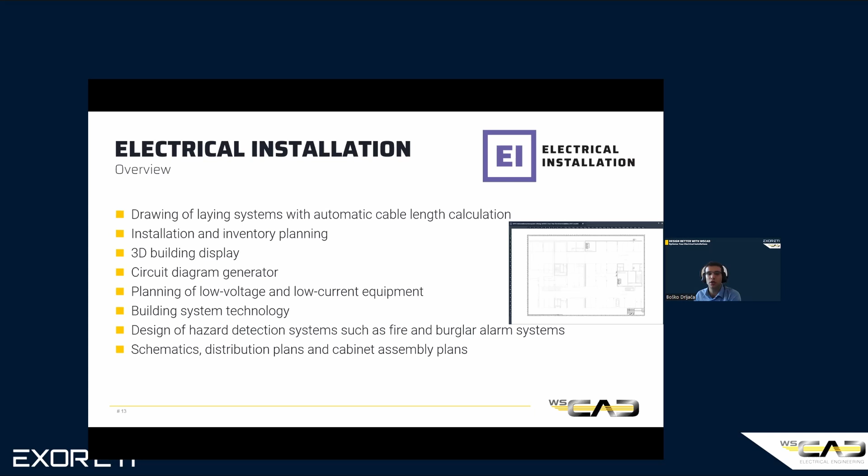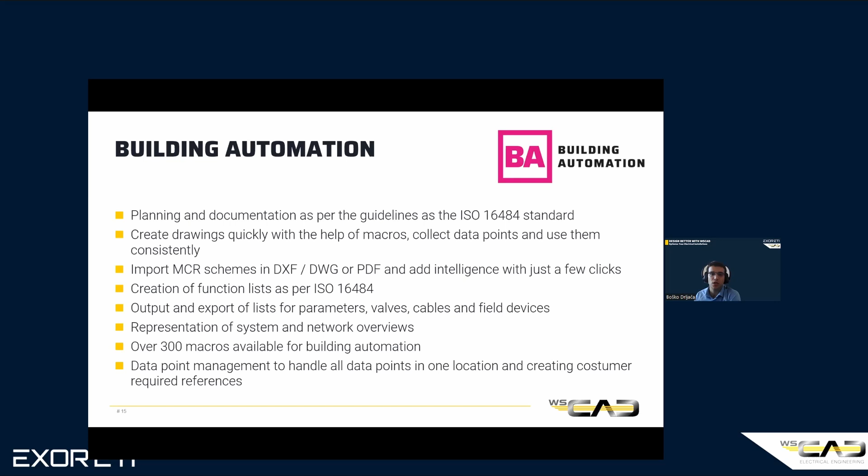I would also like to briefly mention the building automation discipline. It is used for planning and documentation as per guidelines such as the ISO 16484 standard. We have over 300 macros for building automation available with the installation of WSCAD, which improves your efficiency and accuracy. Here we can generate function lists and handle all data points in one location with data point management. You can also create all the necessary references.

As I said, we will also briefly mention the building automation augmented reality application. I would like to show you a short video clip. How does it look like?

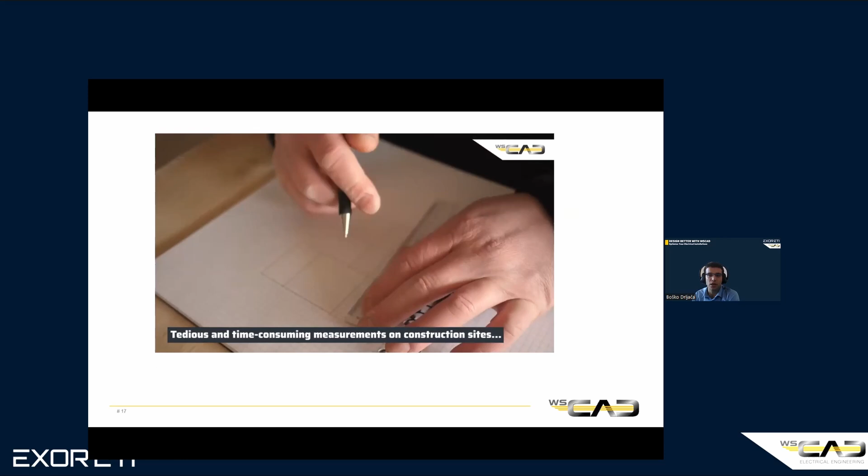So to say it shortly, if you need a floor plan on the spot, you can generate it with our BA augmented reality application using your mobile phone. Simply scan the room you're in. You can also mark doors and windows, and the application will generate a floor plan that you can immediately use and also export to DWG or DXF.

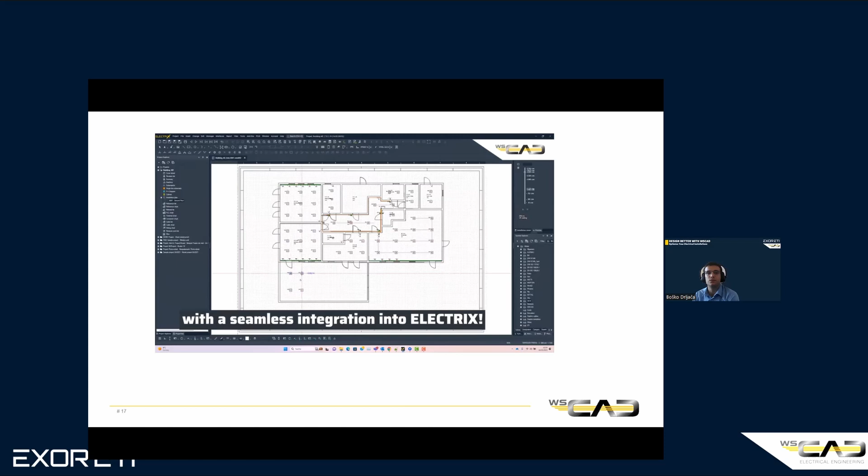I would also like to say a couple of words about WSCAD. As I've mentioned, it's the biggest symbol database in the world. It has over 2.1 million components from more than 400 manufacturers.

It has E-class compatibility. And what I would like also to mention is that WSCAD Universe is integrated in the interface of WSCAD software, so you do not need to open your browser separately to search for the parts. You can do it from the software itself.

Also, WSCAD Universe is free of charge for manufacturers, which is one of the main reasons that we are officially the largest symbol database in the world.

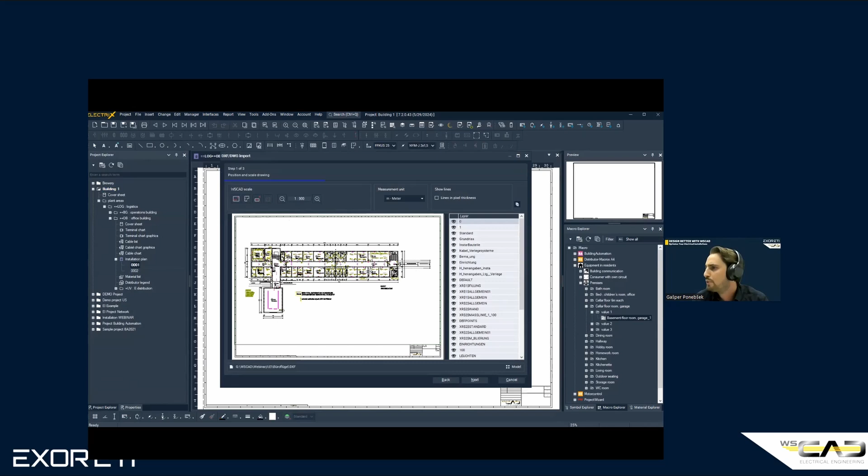These offices, we have multiple layers, so we can zoom in to see there's a lot of layers. So we don't want, for example, right now this description of the rooms. And let's say that we want lines in pixel thickness.

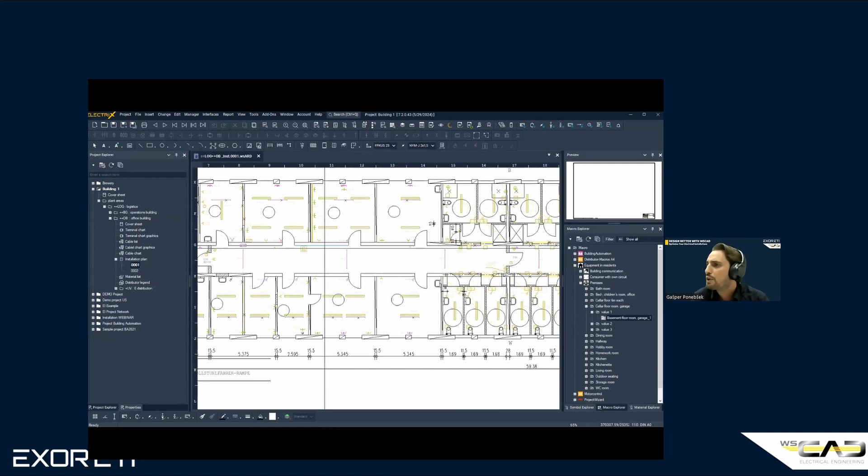We go forward. Here we have two options: embedded in page, but now today we will convert to WSCAD format. Why? Because if you check here, we have these blocks, and WSCAD automatically has a possibility to create blocks with lines. If we zoom in right now, we will see that actually this is an old plan.

We inserted also symbols. Here you can see lamps, sockets, and here you have these symbols. Actually now they're just lines, but we will convert them. WSCAD actually can do it automatically, but right now we will do it manually to see how it works.

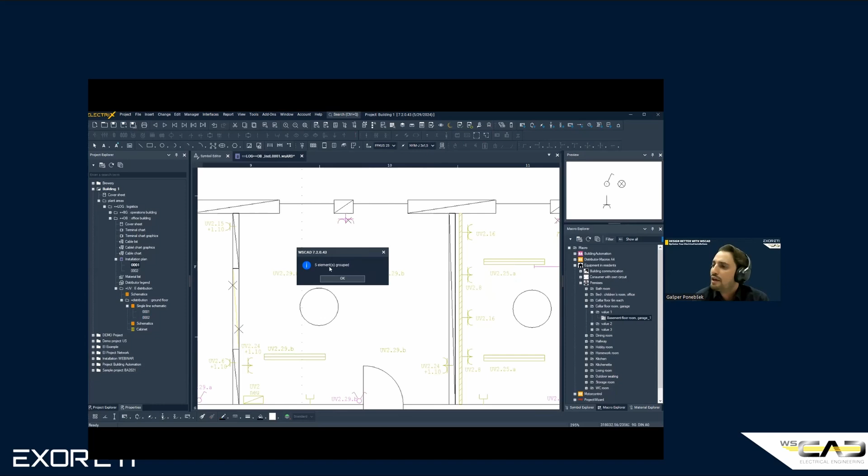So for our demonstration right now, we'll just remove these lamps, and right now we can just create one symbol. So right click, function, graphic selection, and you can see five elements were grouped, and you can see we can open right now this symbol.

You see here we can insert some reference names, we can insert some parts from our database, but right now we will do something more. We will open our symbol editor and add some features.

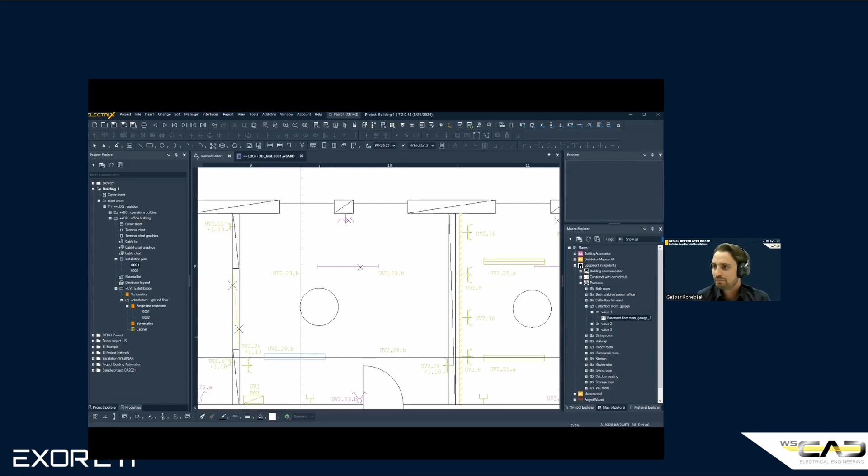We want this symbol to actually be installation, and we want for now that it's standard. We can also categorize it, that this is the lamp. So we will save, and now we have the possibility to swap this symbol. And if we open again this symbol, you can see right now we have much more information to fill out.

So right now we inserted the height, the installation zone 250 centimeters. The reference names, let's say, here would be the same like in the old plan. We can, of course, create some new name.

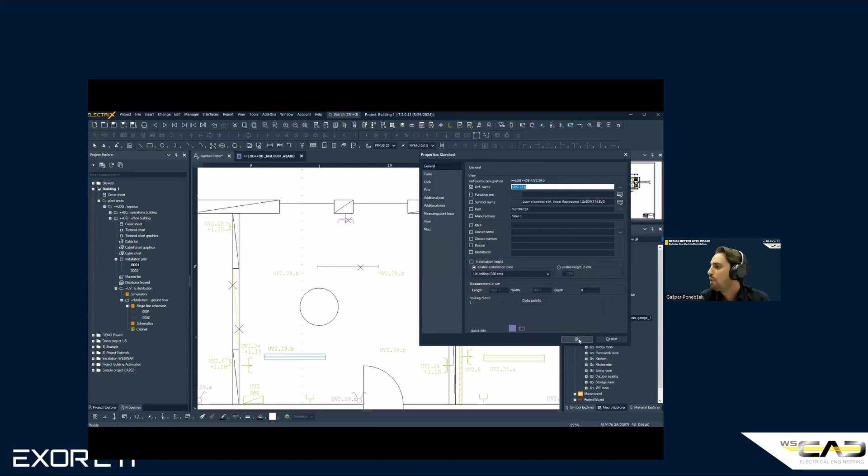Here you can see we can directly import the part from our database. So now we have a lot of information. This lamp actually is this object now, it's a smart object. So we can copy this just to see how you can reuse some old plan from some other ECAD system. And also, WSCAD could do it for you automatically, the conversion of these blocks, so you automatically see that this is a symbol. Okay, we just copy.

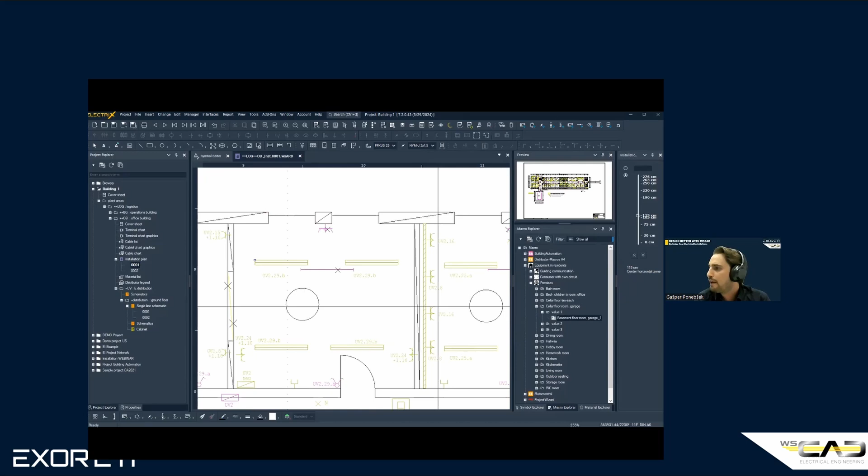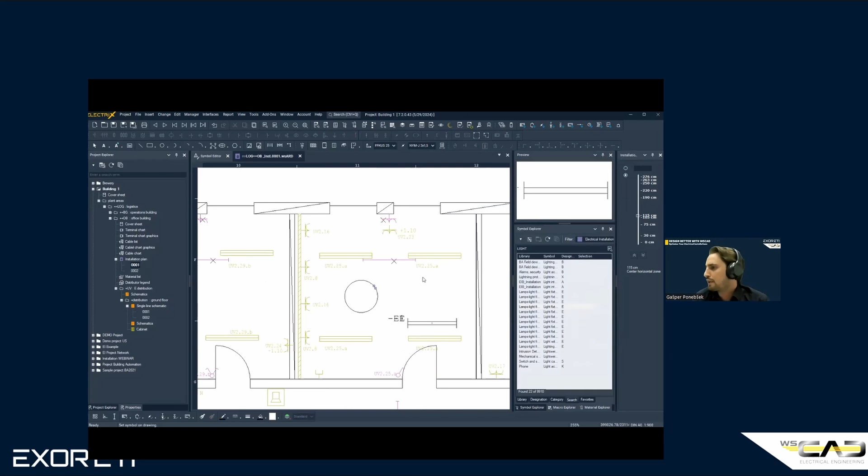And for example, if it's a new DWG or DXF, we can insert our symbols, because we also have a pretty big library of symbols for the installation plan. So like now we just choose some of the lamps.

So right now we will jump into the single line scheme. As we know, in our market we have a lot of customers who are still using single line scheme. That's why we also created a toolbar especially for this occasion, and you can see we can just insert this single line symbols. And here, let's main switch.

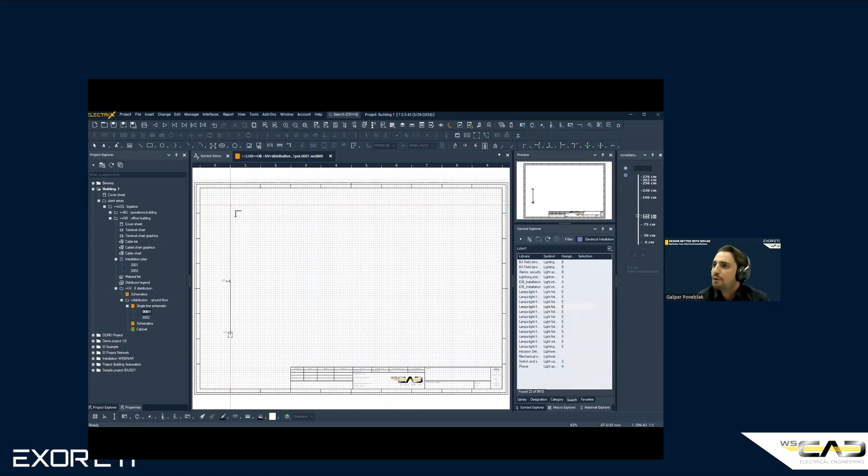We will insert some part from the main switch. Let's choose the main switch from Schrack manufacturer right now, and then we can connect with these smart lines. And here the last line, the arrow, the name should be L123N, because this is a single line scheme.

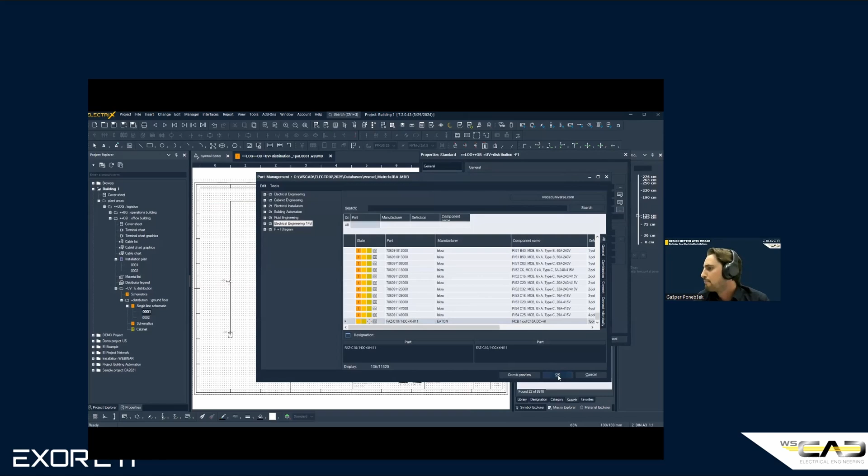And we just need to insert some circuit breakers like this. And also here we can insert some parts. So let's say this C10 amperes, it's good for the lamp.

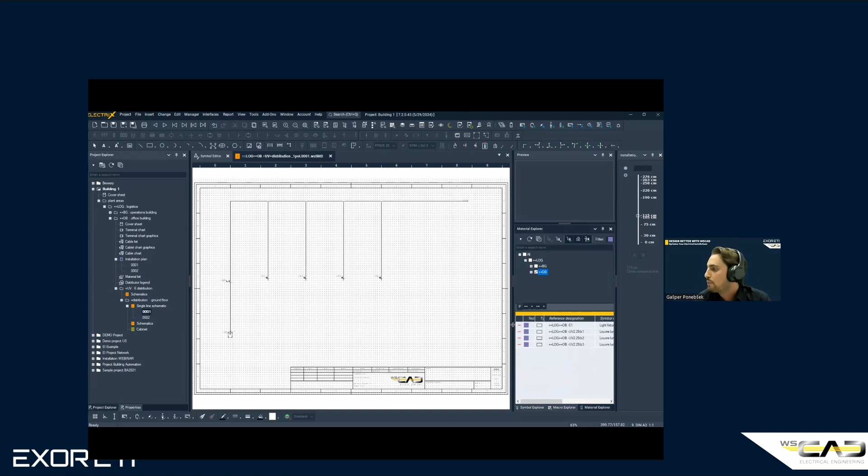And here we also have the possibility to duplicate some symbols or elements in our scheme. Right now we will open this Material Explorer, and you can see in Material Explorer we already have these lamps which we designed in the installation plan. We can just double click and insert it on our one-pole scheme.

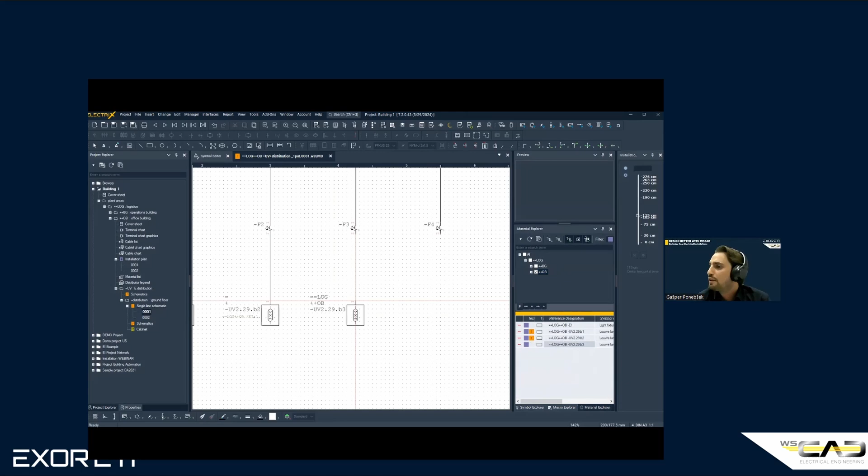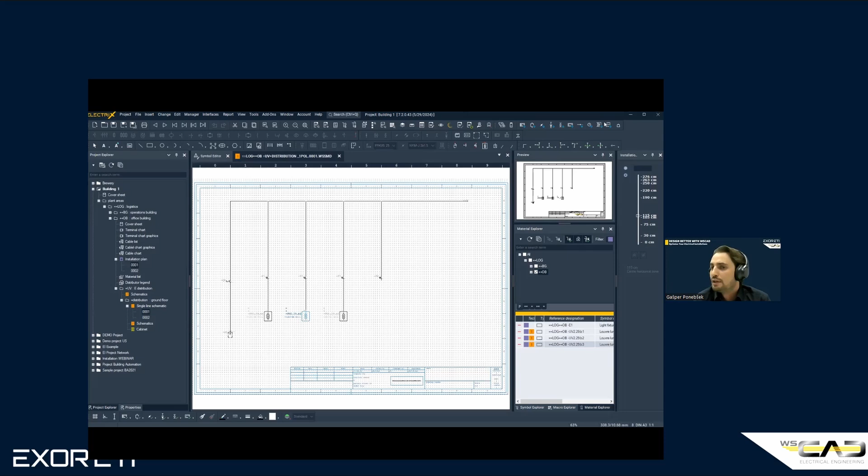So you can see we can connect now this old plan to our WSCAD, and we can do it multidisciplinary. So here we have these cross references. We can zoom in, actually this now is a smart object. Here we have a technology navigator. We can jump back to one-pole scheme. So this is a quick demonstration in what case we can also use our DXF or DWG plans.

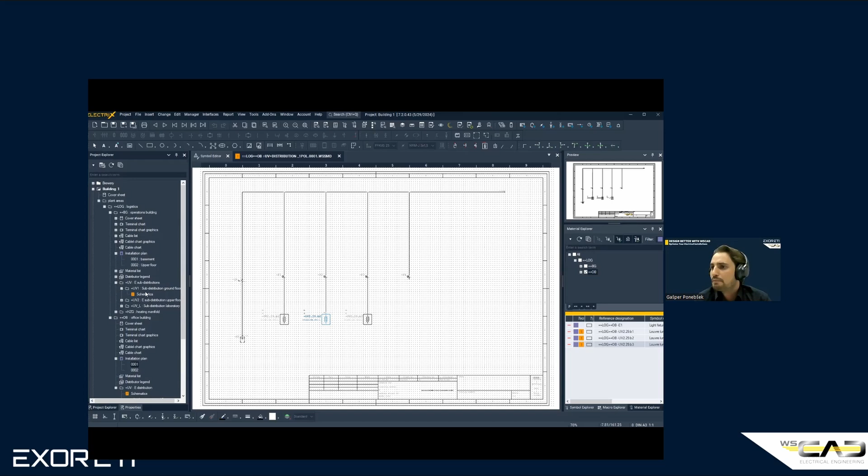Of course, if we don't have any symbols, we can draw it by ourselves, the new one from our libraries. Right now we will go back to operation building. Here you can see we have some sub-distribution, some floor. Here we want just to show you that it's possible with this distributor and circuit manager to actually generate.

In our case, right now, we will generate the three-pole scheme. So we just need to define the distributor and where it should be right now. This distributor is like here in this location. We want to generate some schematics automatically.

We need right now some supply. And you can see here we have macros already predefined. The supply will be TNS without energy meter. And we can go forward.

You can see right now the preview, but we also need some bus bar. So like this, you insert this bus bar. Let's say it's a 4-pole MCB.

And now you can see we can create a new circuit. We can define the circuit name, so it could be the circuit name here. We also predefined names like heating, and then we can go forward.

We can insert some more. Right now we have, let's say, light heating, and there's also a possibility, if the circuit name is the same, we can copy it and paste, and you can see it could be much faster.

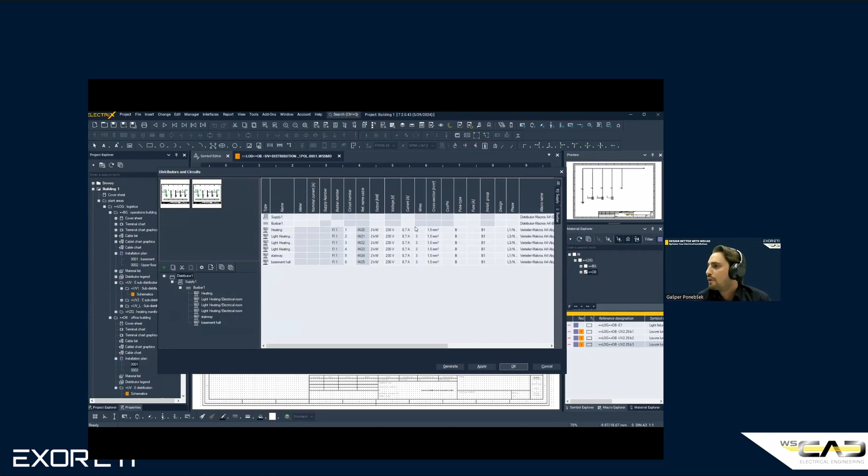And what is very important here, in circuit number we have to number the circuit numbers. We have the possibility to automatically renumber. Also, we can do this with cable reference names. So we just select everything, right click, renumber. It's very efficient, like an Excel file.

And now we will just generate it, select here. And so here it would be, it will be generated.

Now we have just 2 pages because this is our demonstration, but in reality we can generate much more pages.

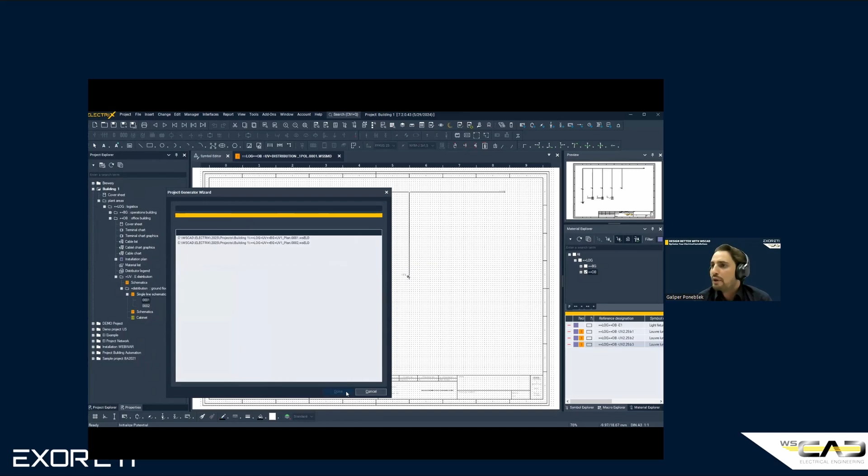Here you can check the supply, okay. This is the name of it, here we have heating.

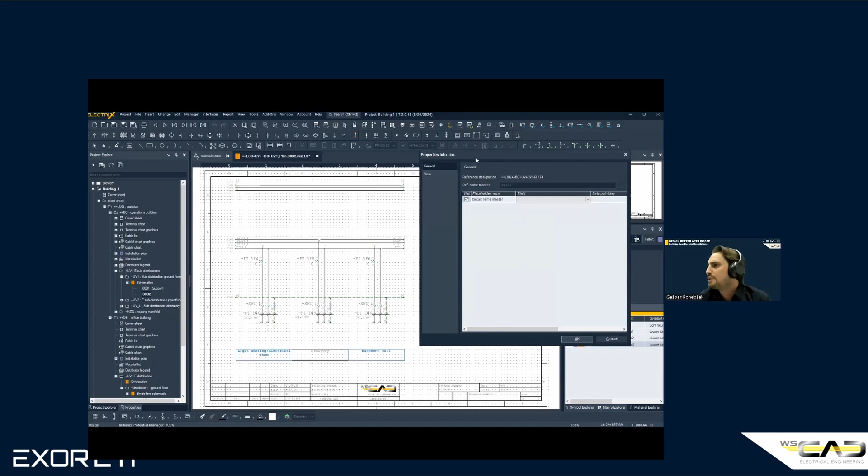You can see the cables are, everything is fit. If we would need more information, we will fit it. Here also, this is information link. You will see later something, we will tell something about the information link.

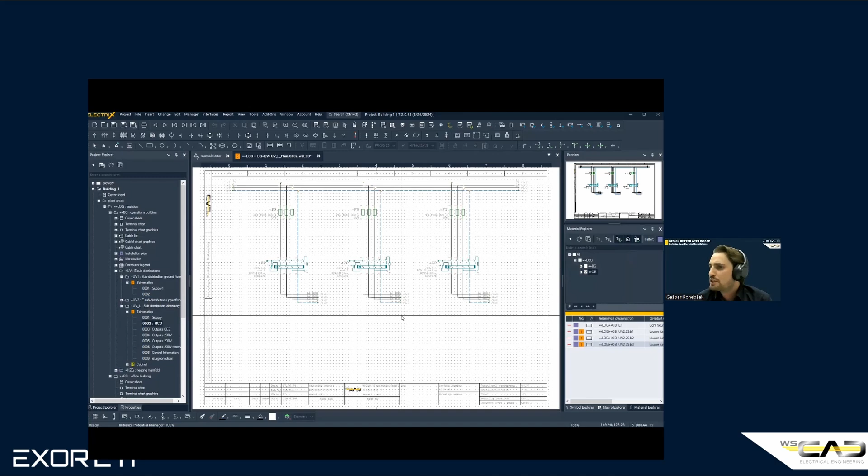Here we have this distribution laboratory. You can see we can check some scheme. You can see we can define potentials, just to see a little plan how you can work with a 3-pole scheme.

And yeah, the next page here, you can see something is missing. We will add some elements. Let's say we will add terminals.

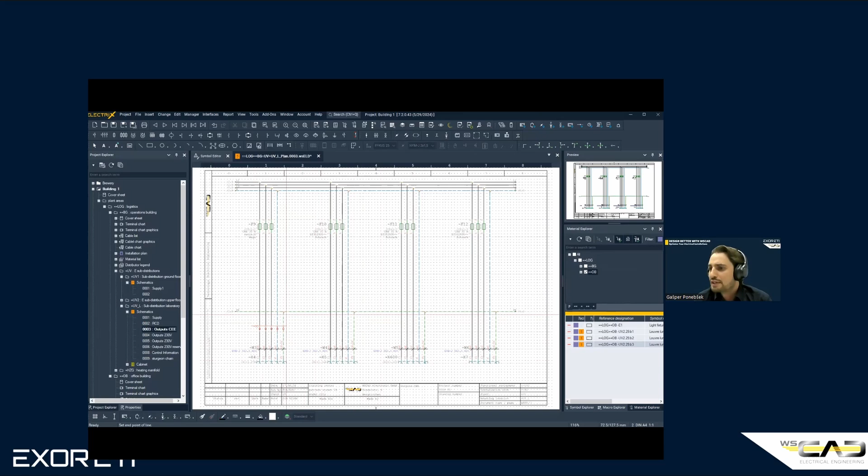We have many options how to insert terminals. Let's say we won't complicate right now, and we will just insert it without the terminal manager. We have much more possibility how to insert elements.

Here, you know, something is missing. We don't have any description about these circuit breakers. We can just find the symbols.

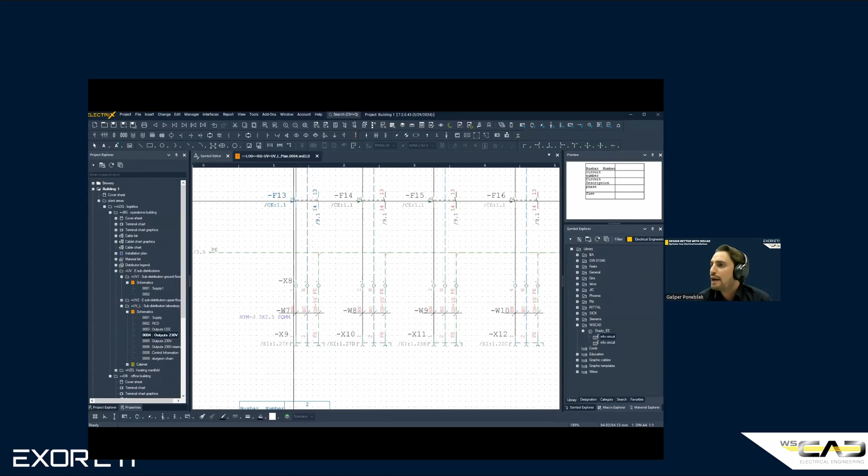So this info link, we can insert this info link. This is a special symbol. When you connect this info link with this, you can see circuit breaker F13 automatically collects the data from this electrical installation.

So here you get all this installation information, which is important here. We can also change the circuit. Maybe just for demonstration, we can change it to heating. And you can see everything is now different.

And here now we can just update the info link. We update it, and now we will insert some more info links just to see how you can easily work with it.

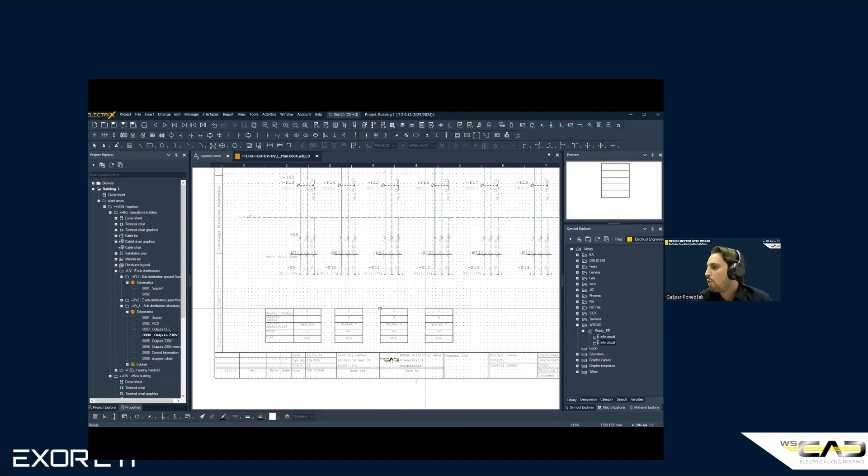So we are gathering this information. Let's copy: left click and again left click, and then you gather all this information. In the next page, everything is already filled out. So we can go to the next page, control information.

Here, yeah, let's say something is missing, the coils. We will insert the coils.

Here we have this contactor manager. We will work with the contactor manager. We will insert the proper part from our database. Let's say this is the proper one for our application.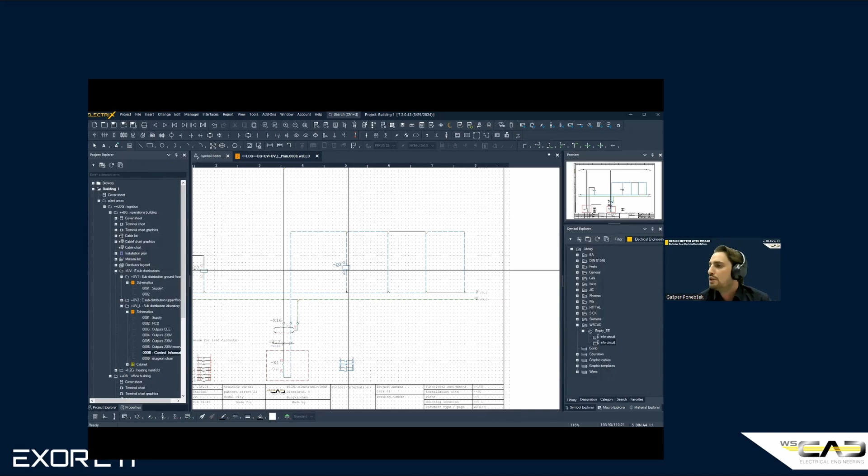And now you can see we have contacts here, and we can also connect, copy, just to see how we can add some more coils with all this information.

So here we have these contacts which are in our part, and you can see the red ones are already placed on the scheme. The green one is reserved, it's just in the contactor manager.

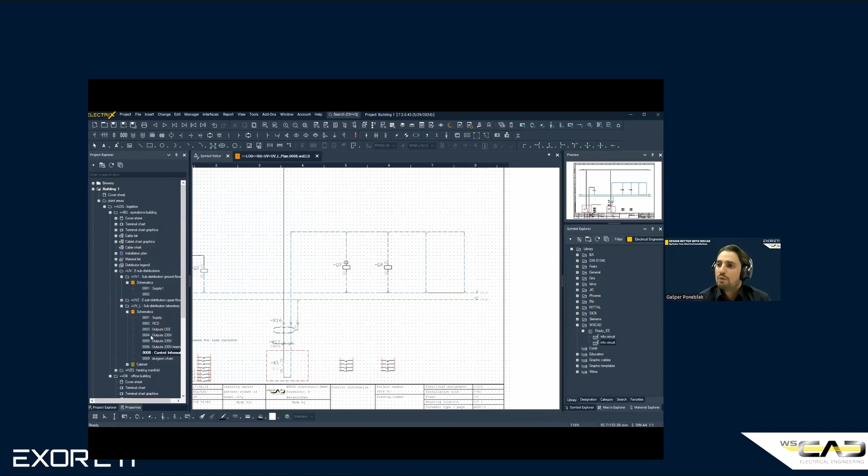So we can go back to our outputs. Here, this contactor is missing, and we can also use these toolbars. Just click here from the toolbar and select which contact do we need.

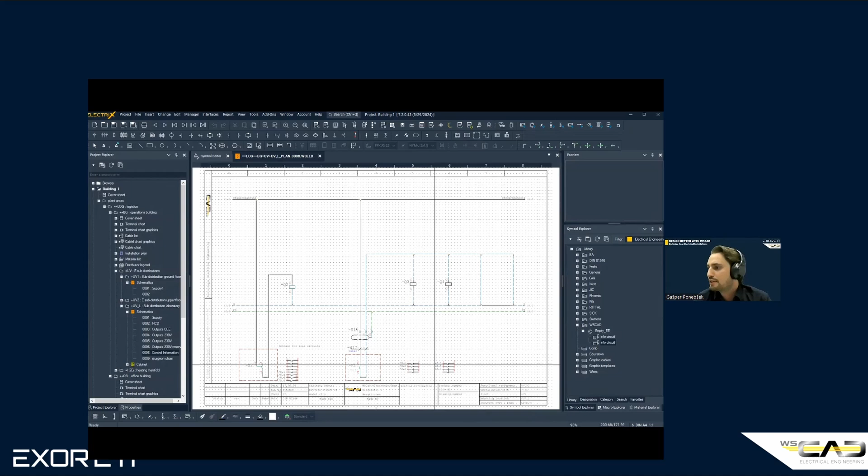So again, a new contactor we will insert, and you can see automatically this cross-reference created, and we can jump now and we can see.

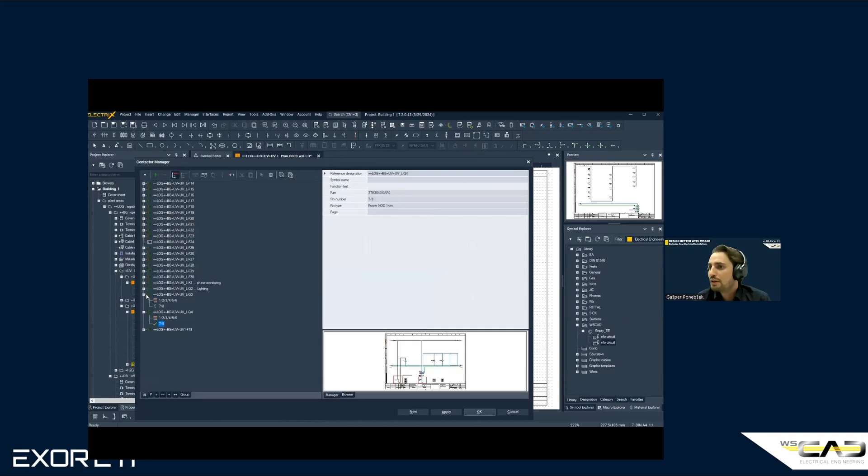So in the last page we also need some contact for our application. We will insert this other coil, from other coil the contact, you can see, and we have all these connections, and we can see how everything is connected. Also here we can connect, because this is not connected.

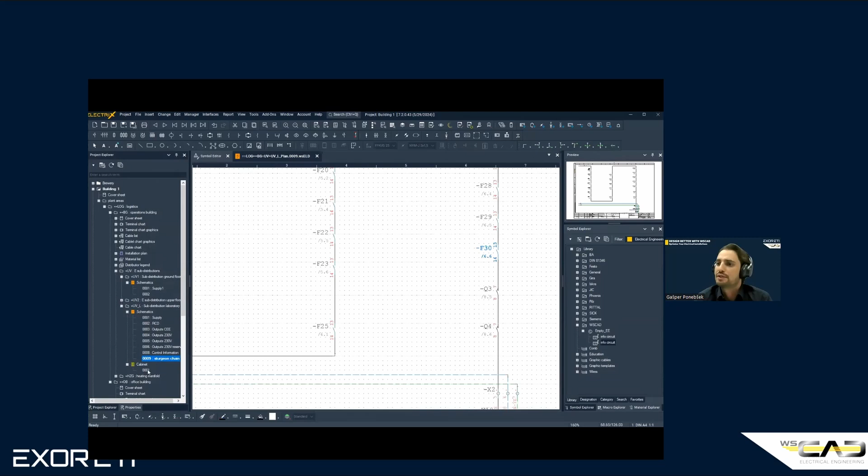So let's say that we finished this part, the three-pole scheme, and now we will just go to the next page, cabinet. On the mounting panel here, we have already some elements, and we can open again this material explorer. You can see we can select our location, and with the filter choose our discipline we want from electrical installation.

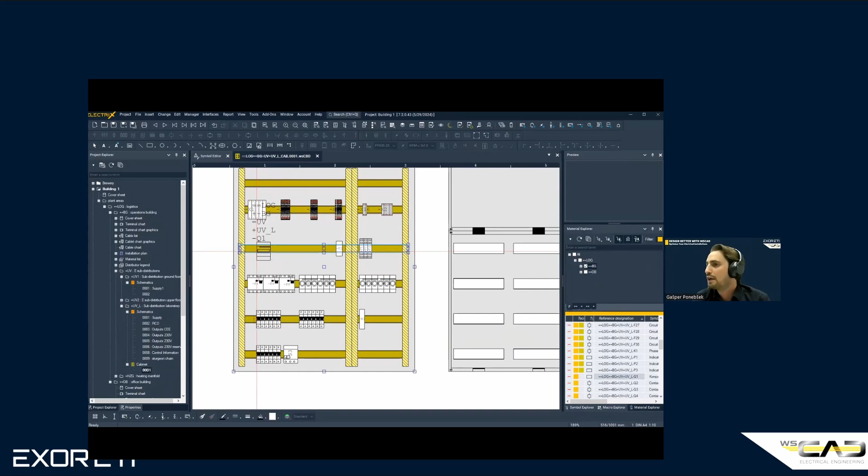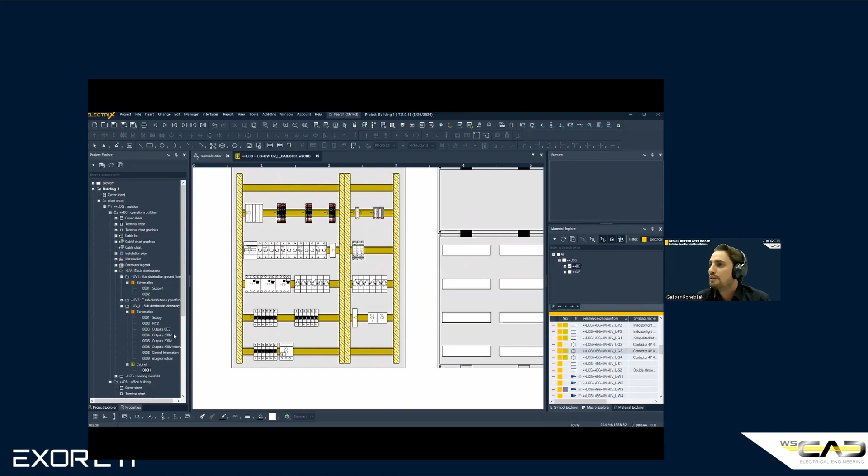Insert some more elements. Let's insert the main switch with double click and place it on the DIN rail. It's easy. And then also, if we want to select multiple elements, for example this fuse, just right click here, select it, and right click, and again left click, and we have this information here. So again, we select the elements and place them on the DIN rail.

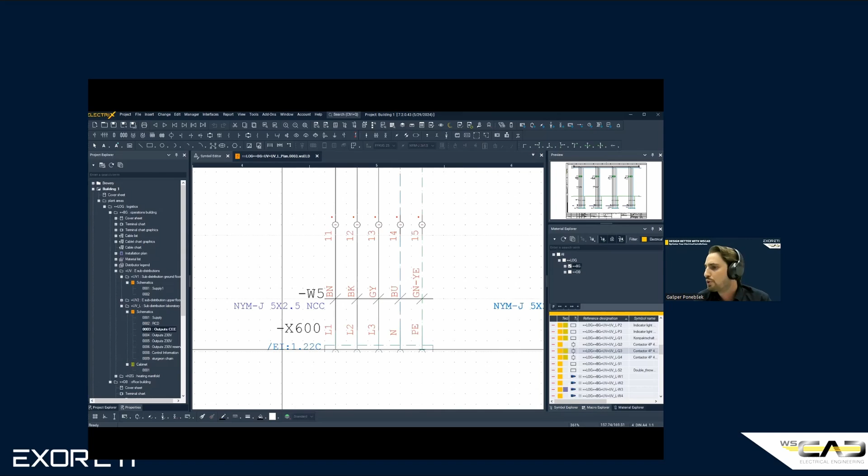So we can go back here. If you noticed, here we have also some cross references to the installation plan. Here, if you remember X7 right now, and this cable, we don't have any cross reference. It's not connected. Now we can, with right click, jump directly to our installation plan.

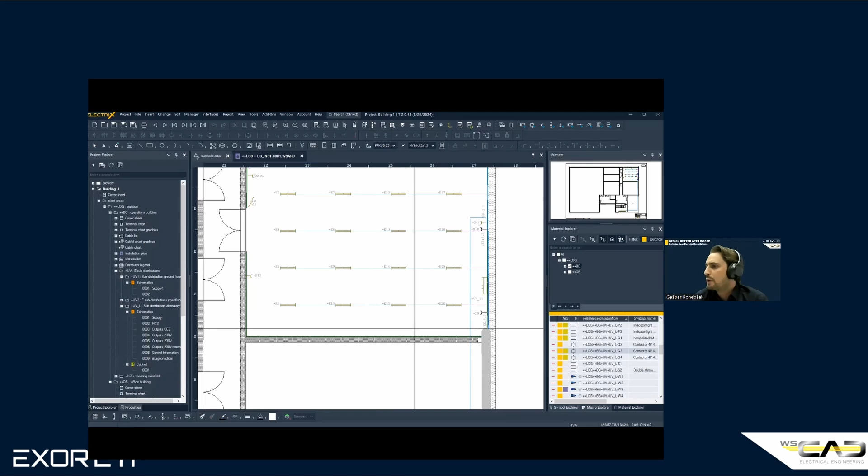So here you can see on this installation plan, we draw the walls, we have walls, we have doors, everything is possible, all these things are possible to insert. And in this room, we have some elements, a lot of lamps, then we have sockets, switches, and so on. And you can see here different colors of the laying system.

Here is gray, here is blue, and the thickness is different. So we can define different laying systems, like let's say in tools settings. Here you can see laying systems.

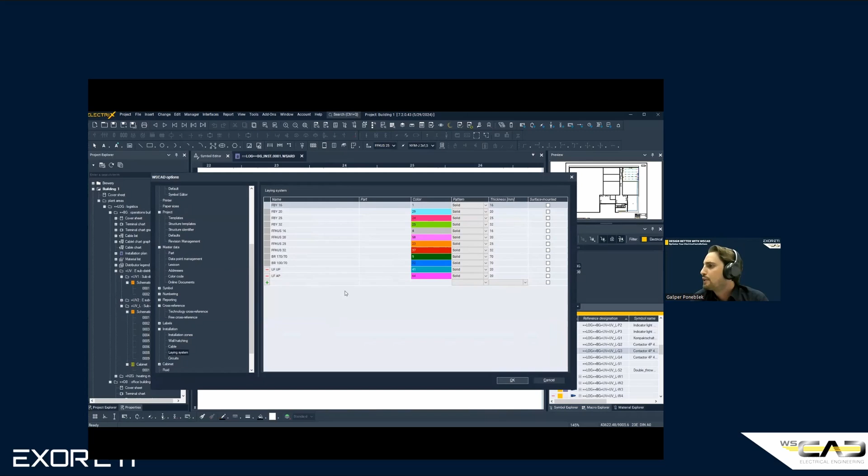If we want, we can define a new laying system with different color, different thickness. This is everything possible, depends what kind of laying system we need for our application.

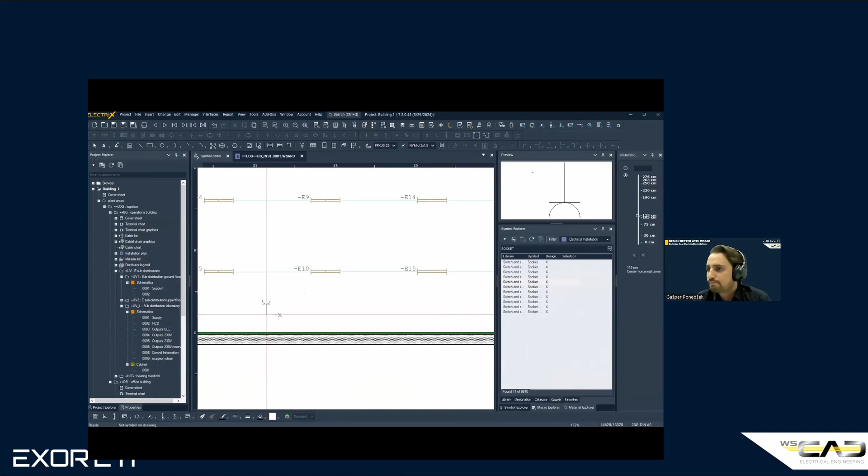So let's go back to our symbol explorer and choose this electrical installation. We will use this search again, and let's insert some socket into our installation plan. Double click, and with this space we can rotate it, and we will place this socket to our laying system.

Here you can see on the right side we have the installation zone. With Q and A we can change our installation zone, so on which height we will insert this socket. Here you can see the reference name X.

We don't have any cable right now, you see there's no cable. And here, if you remember from before, X7 hasn't any connection. Now we just right-click it and get this message to connect. Now we want to connect, and you can see right now we get not just connect with socket X7, we also get the cable from the 3-pole scheme.

So we have a cable right now. That's very good, because we have some more information, and we can just, let's say, everything is referenced right now, and you can see we have this cable, and we can connect.

Actually, this cable was automatically connected to our distributor. We can show the route, and this is automatically connected. We can open the distributor, you can see the cable. Before, we just inserted the cables which we want to be in this distributor, and we can do it again.

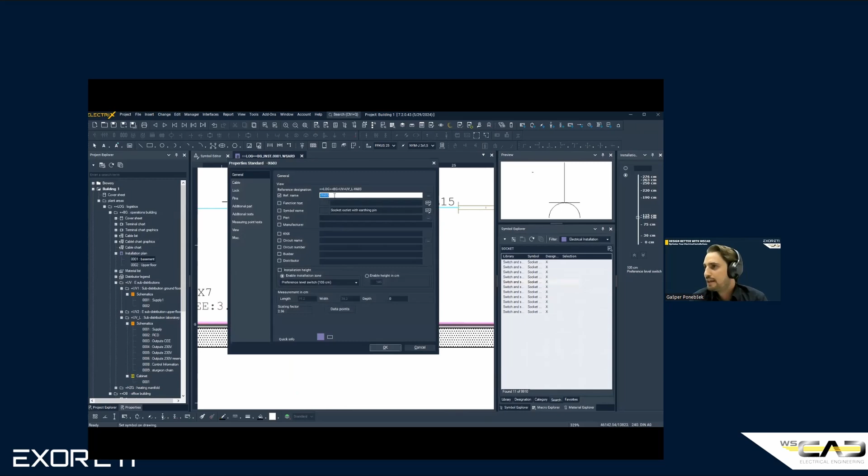So yes, here, let's say X14 is also empty from our project in the 3-pole scheme. Now it's connected, we get the cable W12.

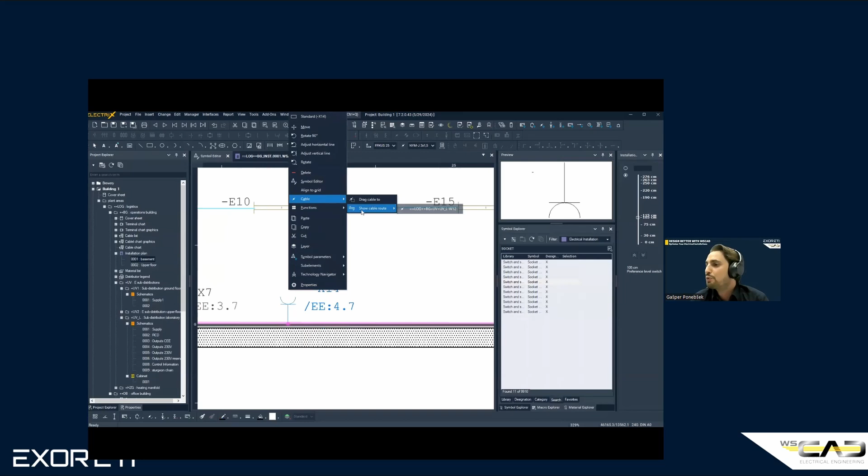And you see it's not necessary to put the socket on the laying system. We can put it somewhere else and define the insertion point.

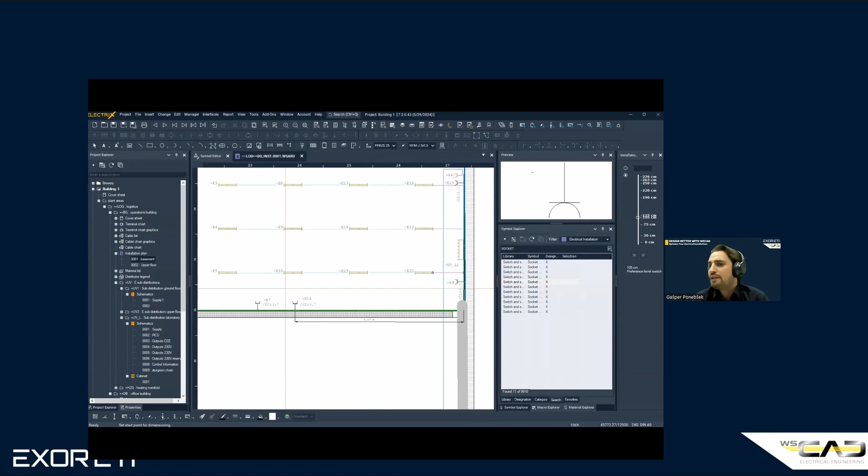Yeah, and what is good, now we have the measure of the length of the cable. We have the length of the cable, and when all cables are set in our plan, we can just generate our report, and we have this length. That's how we can do it.

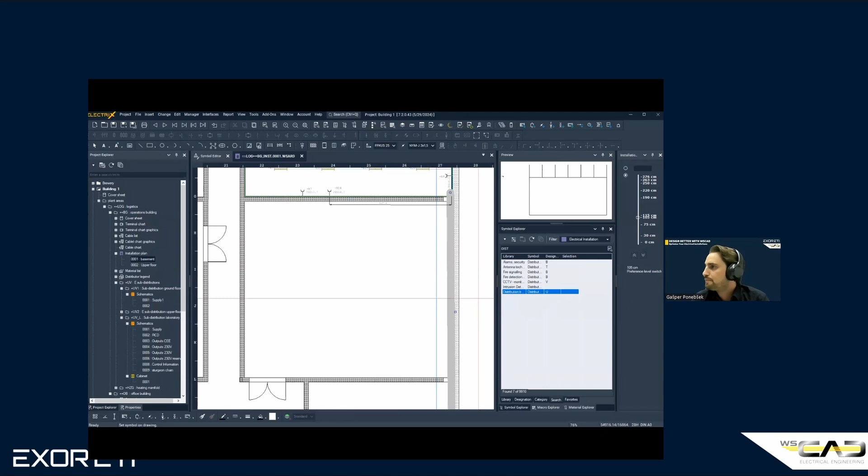So we just want to show you something more. Let's say we will insert some new distributor to the next room, like this.

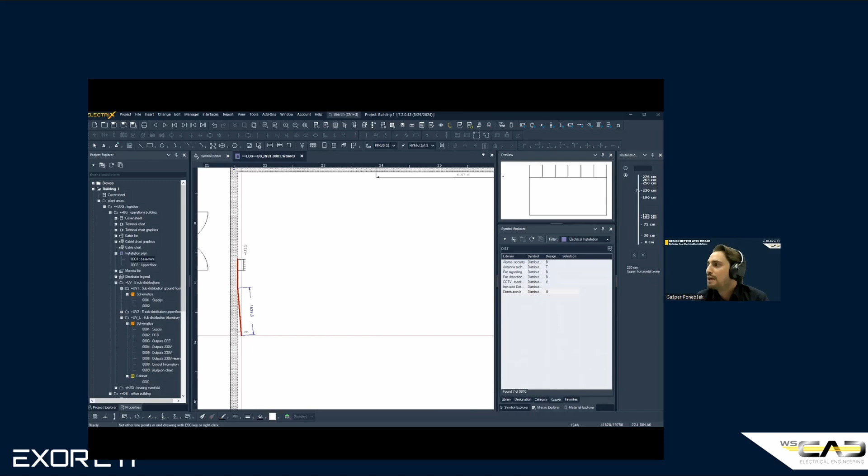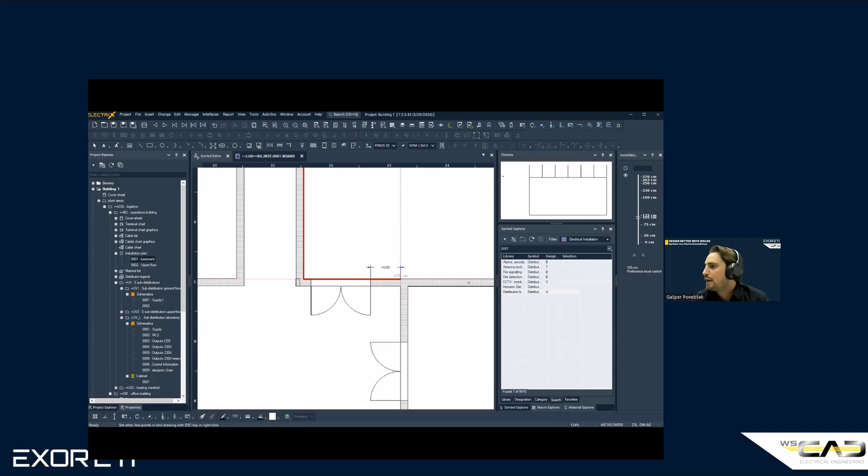And yes, just to demonstrate how to insert some laying system, we can choose some laying system and choose this icon with left click and left click again, and then on the right you see this installation zone, and with Q right now we can jump to 220 centimeters. We can go to the next, and here we have doors, so we can just open and go to the next level, 250, and now you see we will go down and draw something.

We draw the laying system. There is also a macro explorer. We can use this macro explorer, and you can see there are some symbols, and these symbols already have the height predefined.

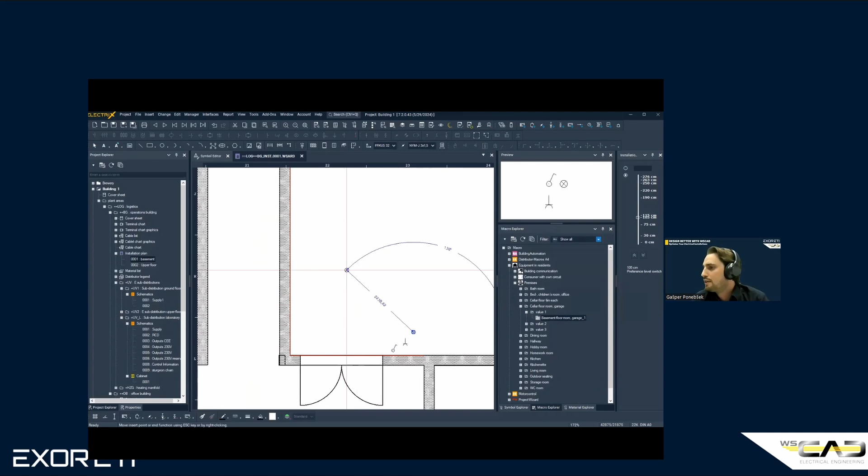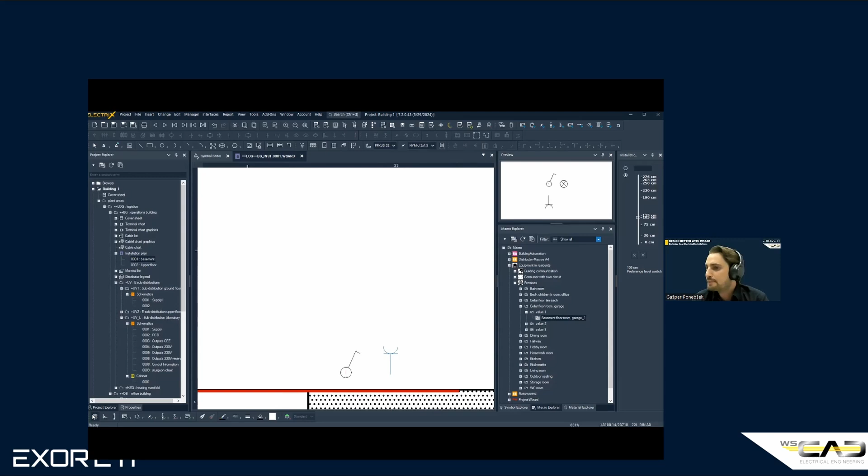So let's rotate this socket, like this, and also we can again put it on the laying system, like this.

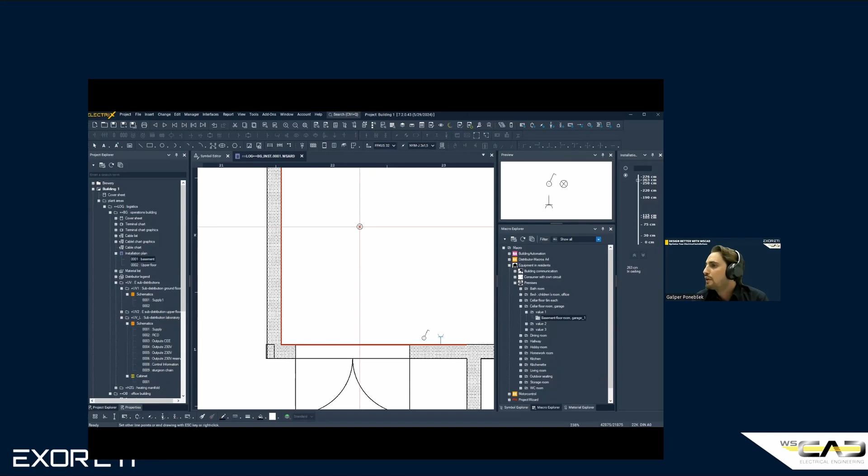And yeah, we can also connect, to show you how to insert some cable and connect cables. Right now, the installation zone will be, actually we will draw this cable in ceiling, goes in ceiling, and then we will turn and go down and connect to our switch.

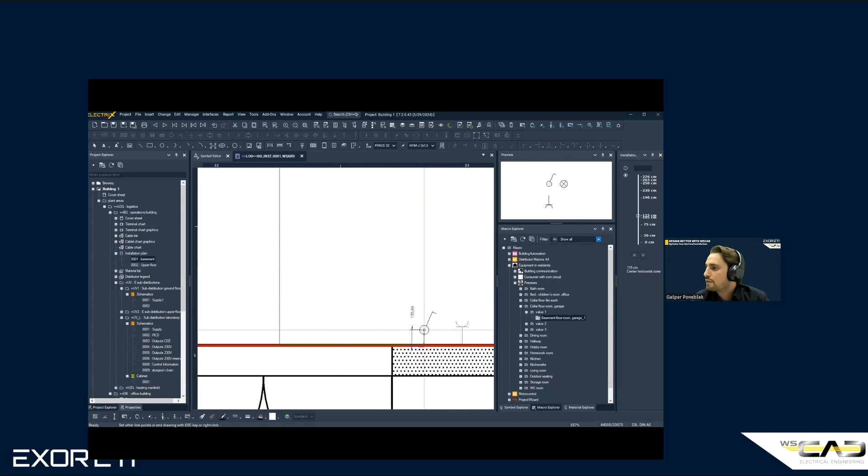Okay, so with connect, we can choose which cable, or define a new cable. We will define a new cable.

Okay, and now we can check everything with our 3D view. Yeah, let's check it.

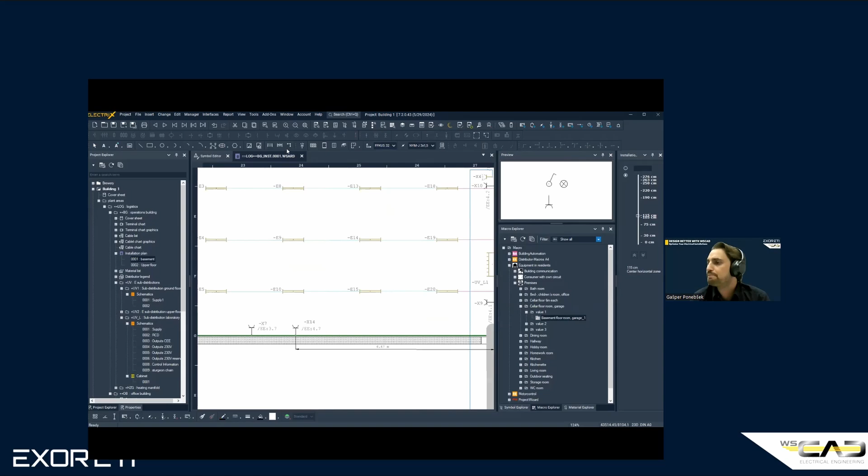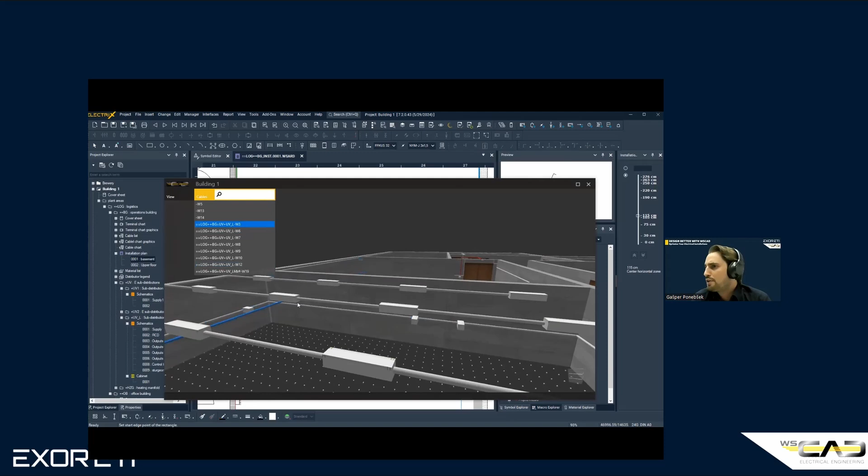Here you can see we just inserted 2 sockets. You can see the name here, it's X14, X7. Yeah, here we have cables, we can check these cables. W6 was from X7. Then another cable, and then we have this other cable which goes to our main distributor.

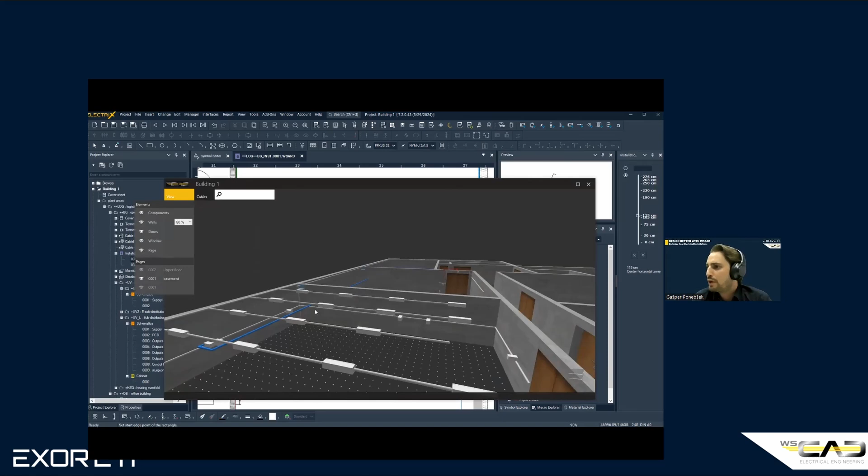So you can see how we can create this, and here we have also the view. We can close some page or close the door view. We have multiple options, you can see we can check all components, and here there are many stories, floors. So actually we can create some building.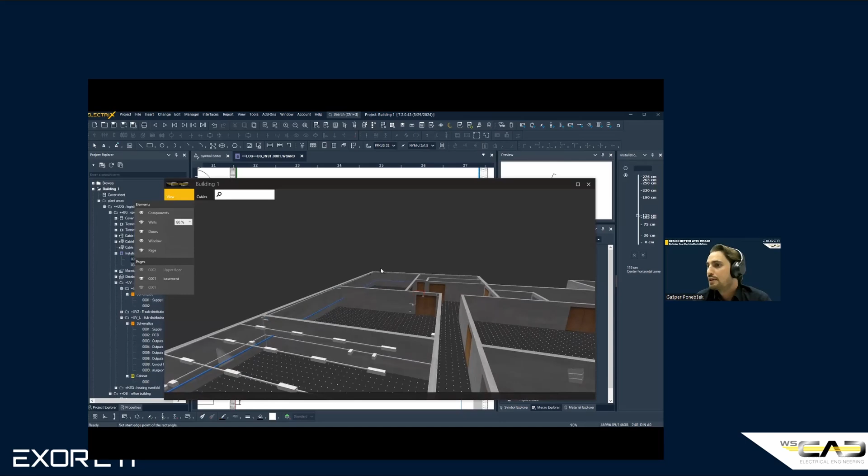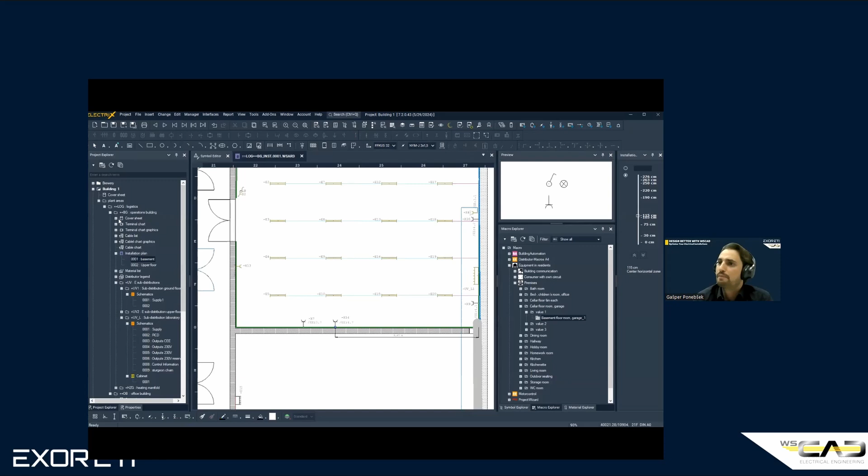If there are 10 pages, every page is each floor. So if there are 10 pages, we have 10 floors, actually the building with 10 stories. Here also you can see we created this cable, new cable. You can see the blue mark. So for now, let's go just to our reports.

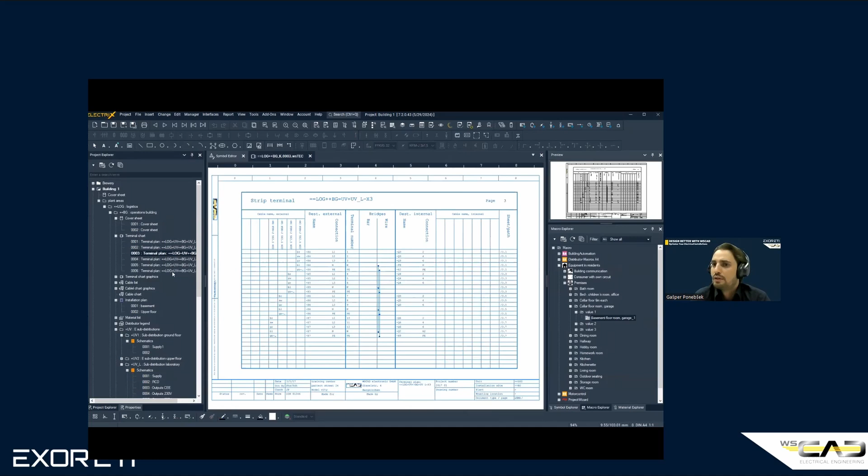You can see the main page, cover sheet. We have multiple templates which you get within installation of WSCAD. For example, if we have a multi-level terminal, we can represent it graphically. It's much more easier to read. So we have a graphical cable plan.

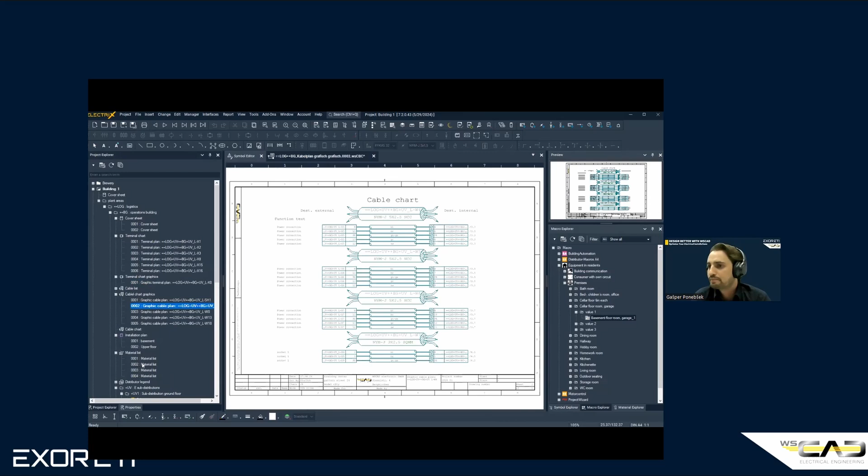Here are material lists. You also have the possibility to export in Excel or other formats. Here is the distributor. We can also generate this distributor.

Let's say we will generate this report again, and you can see some new information here. And for the end, we will export this project into PDF.

We go here, and you can see the output with symbol parameters. We choose, it was already chosen, this option, meaning when you go with the cursor over the element, you get more information. You will see right now. Okay, this is the first page, cover sheet.

We can go forward. Yeah, we already saw this. So here we have our installation plan. We can zoom it. Yeah, this is the option.

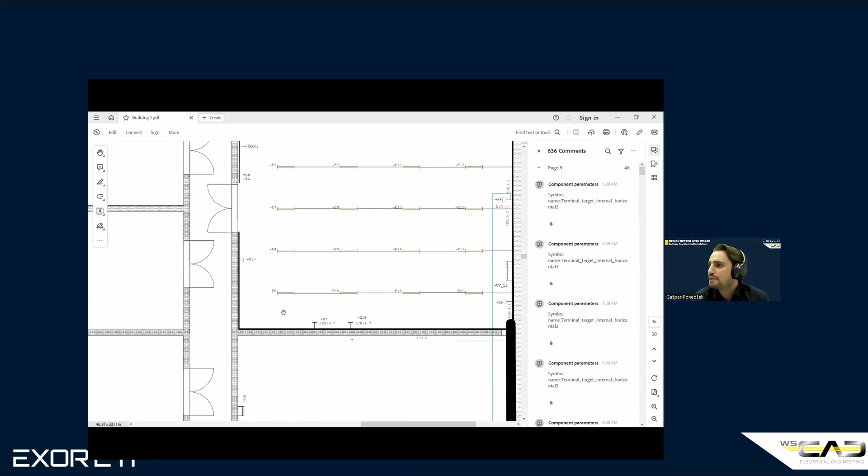You have much more information when you go with the cursor. Then we can jump, as I told before, from one discipline to another. We have this reference from one page to another. Everything is connected. It's easy to read.

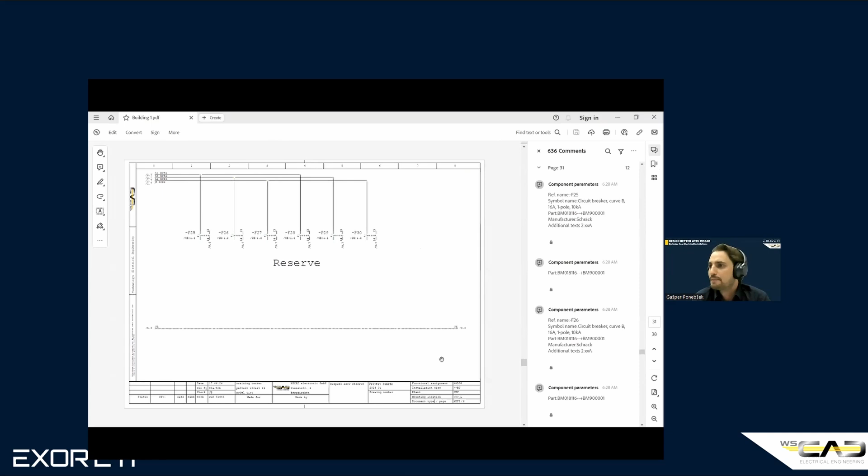Here we have these info links, and we can go forward. Let's also check a little bit our plan. Here's our cabinet, and this is an imported DXF. These are our symbols, and we have all the information.

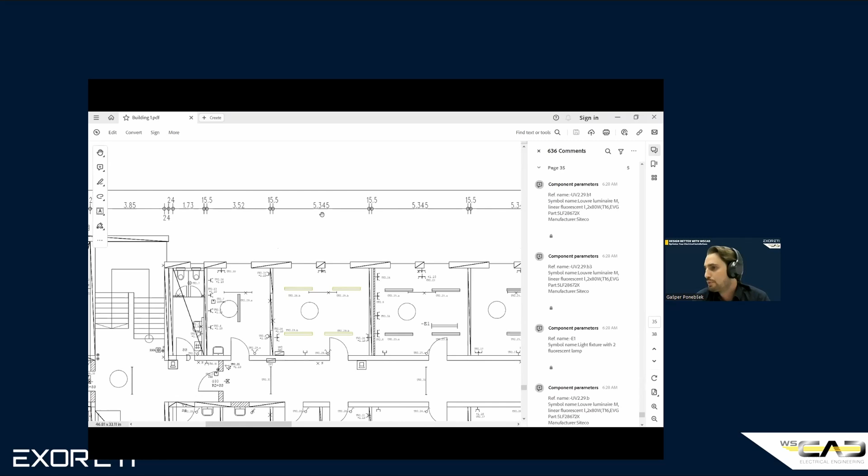Everything is connected. If we need, we can also insert this reference, so it could be here too. We can go back to our one-pole scheme. And you can see, with a right click, we can jump back to our installation.